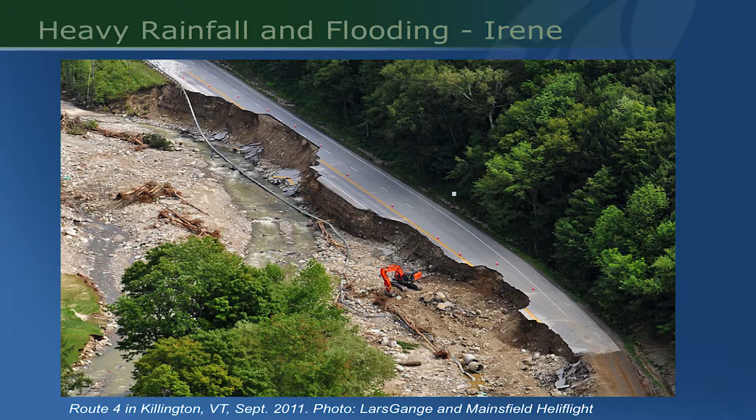This kind of woke up the Northeast, Hurricane Sandy, and there's now a lot of talk about resilience in my neck of the woods. This was a year earlier in Vermont, where we had 10 inches of rainfall in a very short period of time, and it washed out a lot of highways, hundreds of miles of highway around the state. This is a big excavator, by the way, this little orange thing. A lot of problems, took out several hundred bridges, they're still fixing some of those.

That's because we've seen over the last 50 years an increase in intense storms. Up in the Northeast, we've seen a 67% increase in the last 50 years. It's about a 20% increase in intense storms in the Southeast. And even in places where there's less rain overall, in the Southwest where there's a lot of drought, storms tend to be coming in higher, more intense dollops of rain, so they're having to deal with runoff.

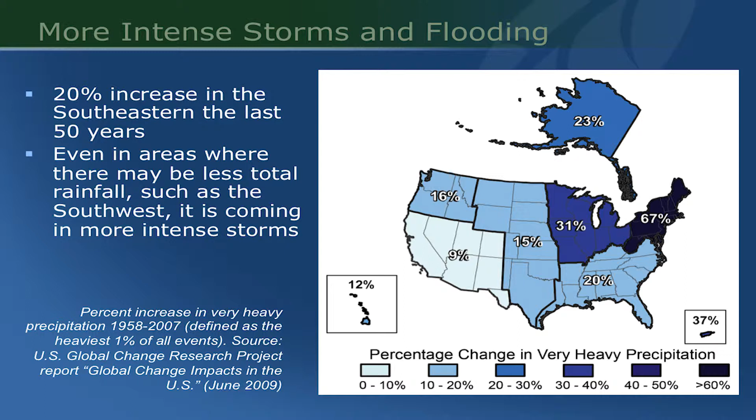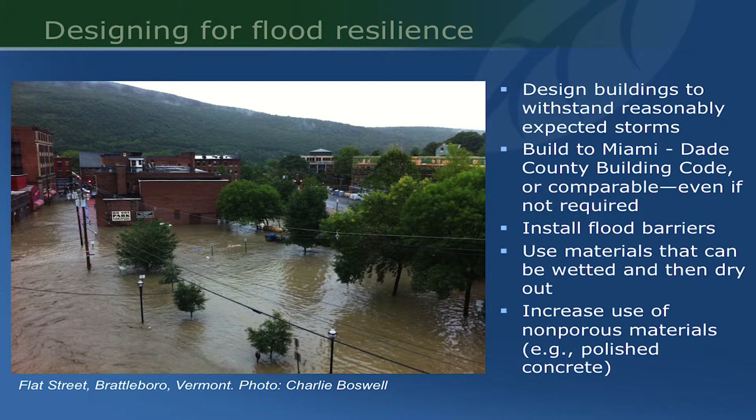I'll tell you a quick story about a building just off to the right in that last image, this youth theater, New England Youth Theater, built a few years earlier. When they were building it, even though it was above the FEMA flood elevation level and met all the requirements, they said, well, let's just plan for the unexpected.

They installed what are called flood barriers in the entryway systems. It's an aluminum track into which these aluminum panels can be placed. The morning before Hurricane Irene hit, they deployed these, I think, 20-inch flood barriers. Again, even though they were well above the defined FEMA flood elevation, they did that before leaving. The water came up to within 1.5 inches of the top of those, and it basically saved the building. It would have been dramatic damage for a pretty new building.

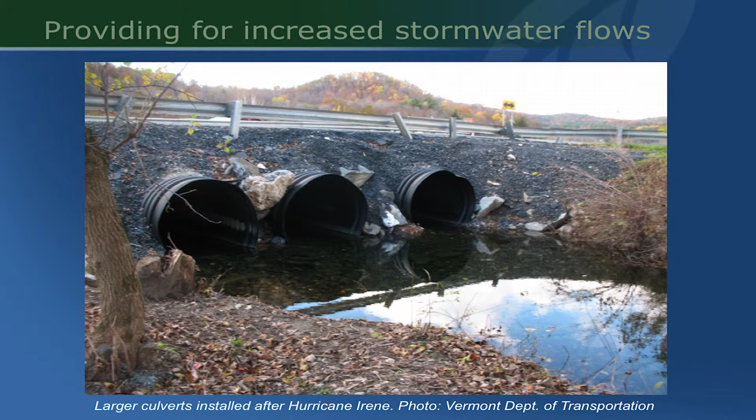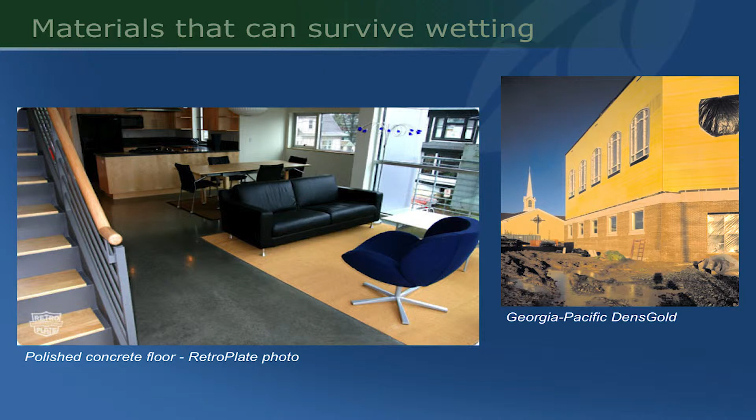We lost a lot of culverts, and when they were replaced, we put in larger diameter culverts or multiple culverts to spread the flooding. We can look at building materials that you can get wet and then can dry out, things like concrete floors. We have a polished concrete floor we're standing on here that can create a nice finish. Even in homes, it's increasingly used. Instead of standard drywall products, there are fiberglass-faced products that are much more resistant to water.

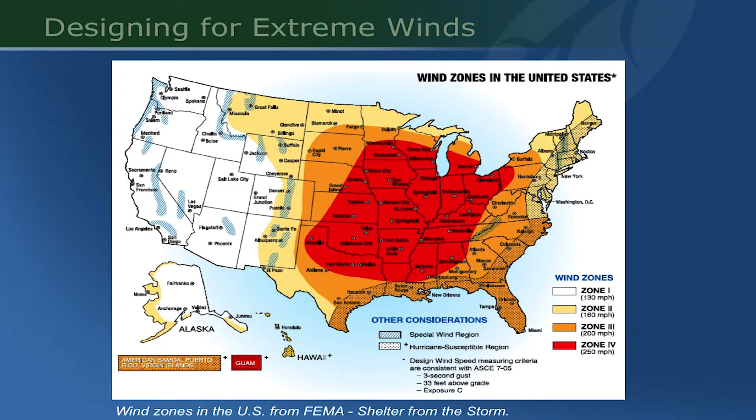We should look at designing for wind. This is the FEMA map where red is tornado vulnerability, and this checked area on coastal areas is hurricane vulnerability. So designing for high wind requires products like hurricane tie-down straps, made by a number of companies, to reinforce structures in residential and commercial construction.

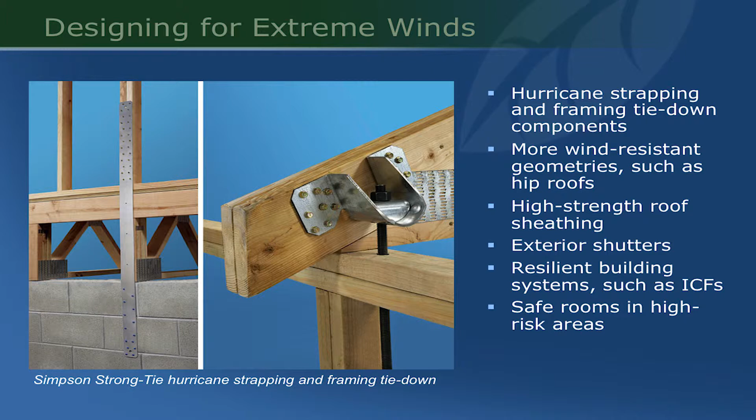We're also seeing in the tornado belt of the country increasing installation of these safe rooms or storm rooms, and there's never been a recorded fatality of someone in one of these safe rooms, even during the worst tornadoes. Designed for higher temperatures, this really is looking at what's ahead with climate change.

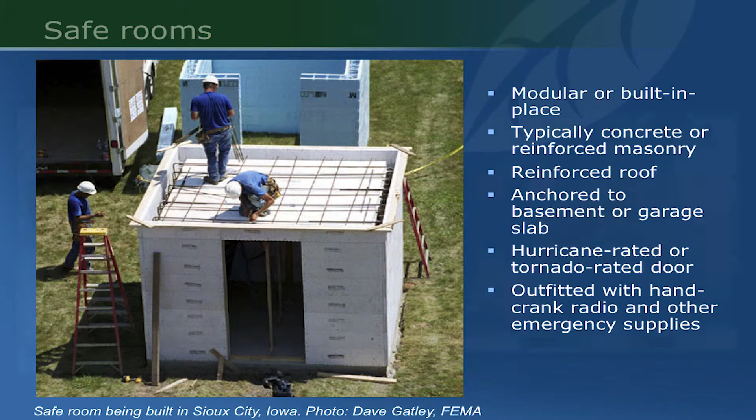The assumptions we've used in the past for designing the size of air conditioning systems may need to change a little bit as temperatures rise.

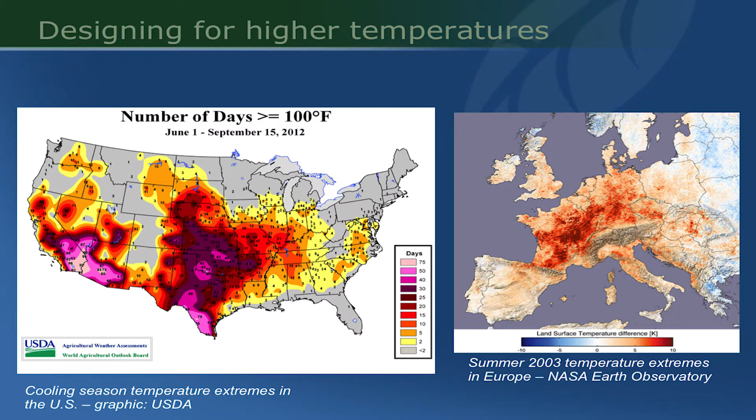And if anything we can do to reduce the amount of driving needed helps keep the broader environment a lot cleaner. And then part of resilience is designing for power interruptions.

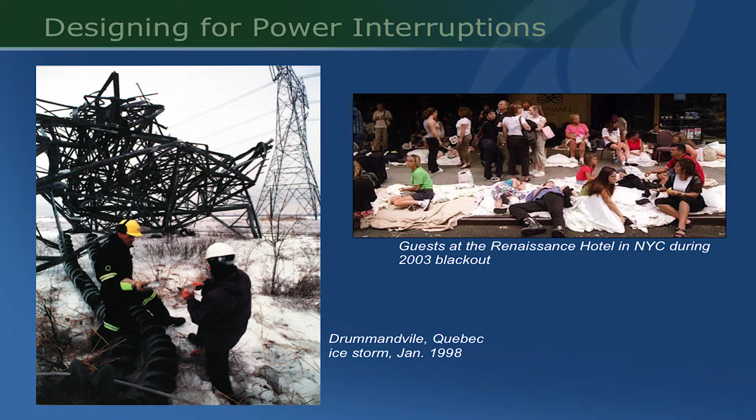In our part of the world we have to worry about things like ice storms. We don't have to worry about that as much in this area, but there are other concerns that could cause power outages. Even drought. This was a map MSNBC produced when, in 2007, there were 24 nuclear power plants that were very close to having to shut down because of lack of cooling water.

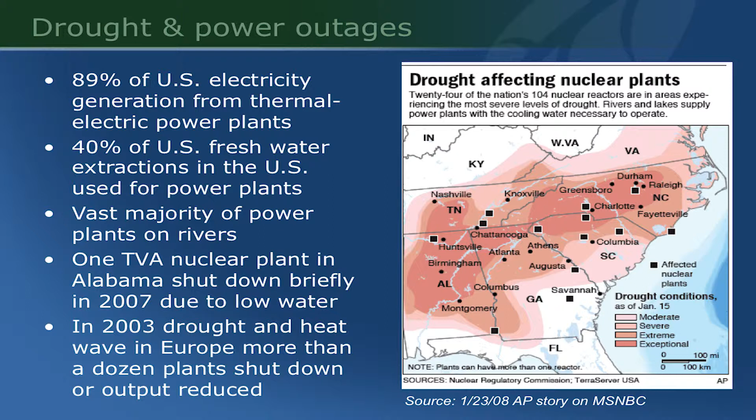89% of our power generation in this country is thermoelectric power plants, where we have to generate steam and then cool down that steam, so they require cooling water. So a long-term drought can actually turn into a power outage regionally.

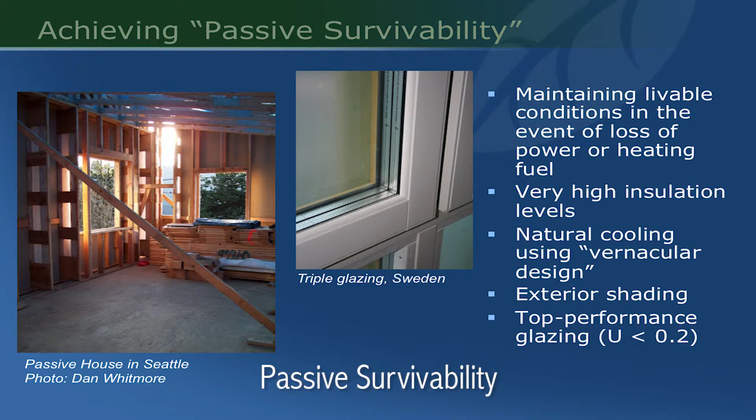And the strategies for achieving this resilience, or sometimes called passive survivability, is a really robust building envelope that we talked about. Finally, I'll close by mentioning the concept of food security and the idea of integrating food production into the built environment.

There are some innovative ways to do that with hydroponics, and a fairly new practice of combining aquaculture with hydroponics. Aquaculture is raising fish, and the waste from the fish can be used to fertilize the hydroponics, so they refer to that as aquaponics, where you marry those two technologies.

And with that, that's it.